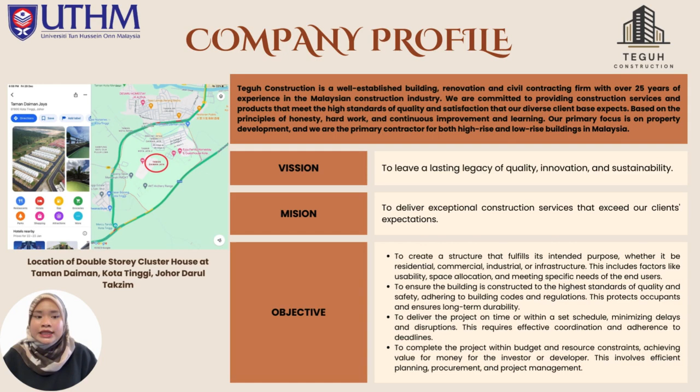Before this, I said that our group project is using Microsoft Project and Esteem. Okay, I want to explain what Microsoft Project and Esteem are. Microsoft Project is used to plan all activities involved in the additional structure work design, such as work progress, summaries, S-curve, and Gantt chart.

And Esteem is a piece of software that can take in and analyze almost any architectural shape, whether orthogonal or free form. By combining the given input, Esteem allows users to enter any type of floor plan the architecture is capable of. Alright, next is our project planning and scheduling.

For our project title, which is double-story cluster house, we start on 1 January 2023, and the duration of our project is around 252 days.

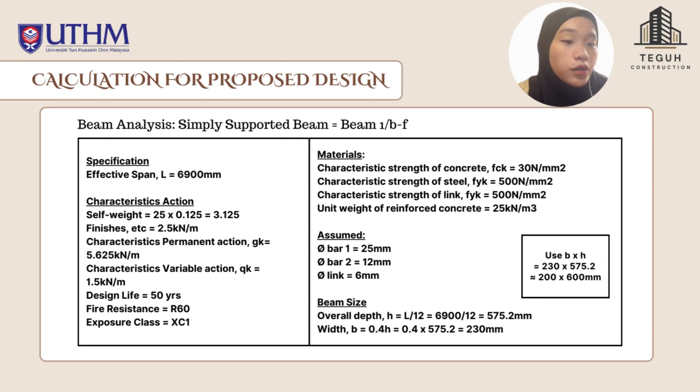Next, for the slab analysis, we choose 1-3/B-F slab, which is the one-way slab. The specification: the long span is 6,900 mm, the short span is 2,850 mm. Therefore, Ly over Lx is equal to 2.4, which is greater than 2.0, which means it is a one-way slab. The assumed bar diameter is 10 mm.

The slab thickness is 100 mm. The minimum thickness for fire resistance is 230 mm. The estimated thickness for deflection control is 142.5 mm. Therefore, we use h equals 150 mm.

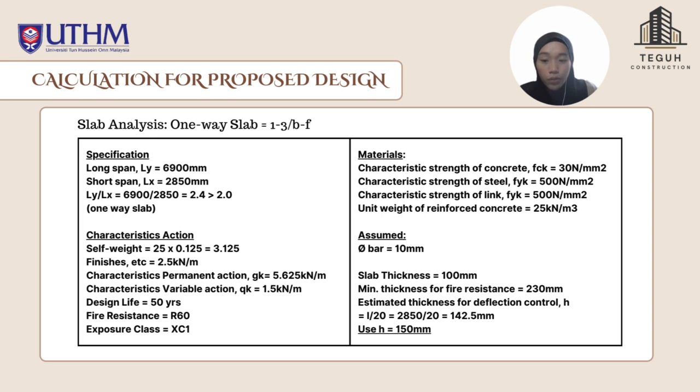For the column analysis, the design life is 50 years. The fire resistance is R60. The exposure class is XC1. The characteristic strength of concrete is 30 N/mm². The characteristic strength of steel is 500 N/mm². For the column size, the floor height is 3000 mm and the D is 200 mm. Therefore, we use a width of 200 mm and a height of 200 mm.

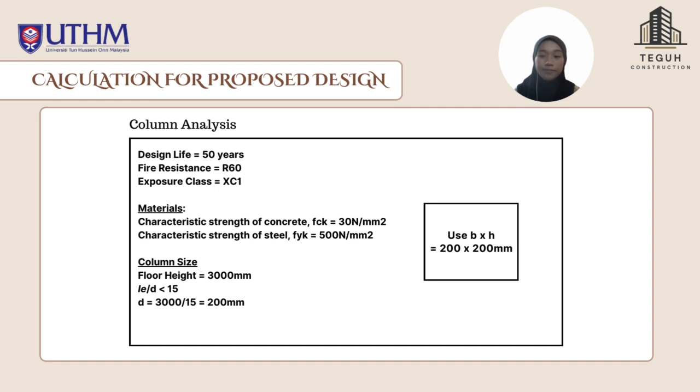So, for the data analysis, the manual calculation for beam, slab, and column. By taking grid line 1/B to F, the beam is a simply supported beam. Through the manual calculation and analysis, we propose a new beam size of 200 times 600 mm. For the slab, we have chosen grid line 1-3/B to F. Since Ly over Lx is 2.4, which is more than 2.0, it is a one-way slab. We propose a new slab thickness of 150 mm. Lastly, we propose a column size of 200 times 200 mm.

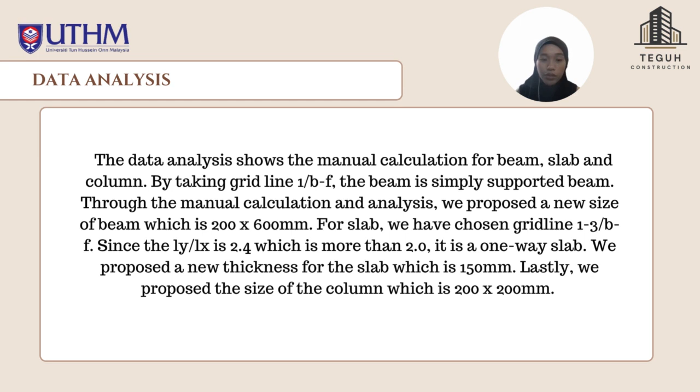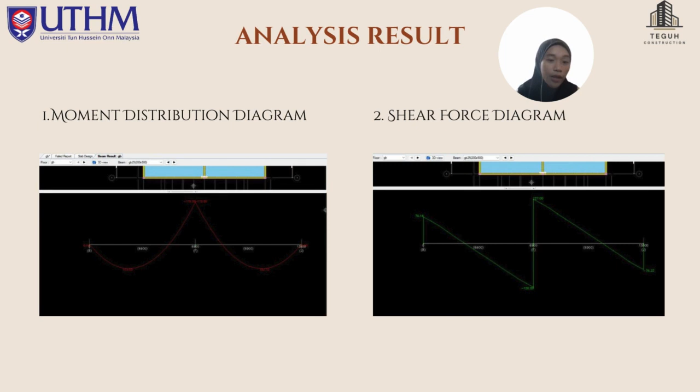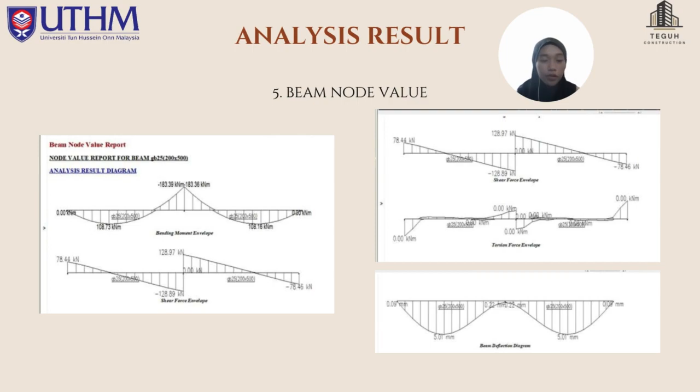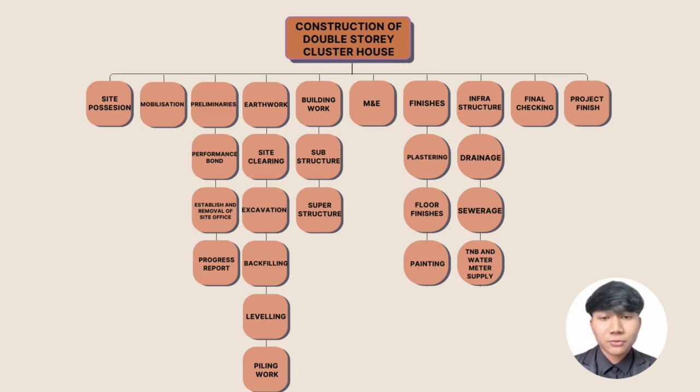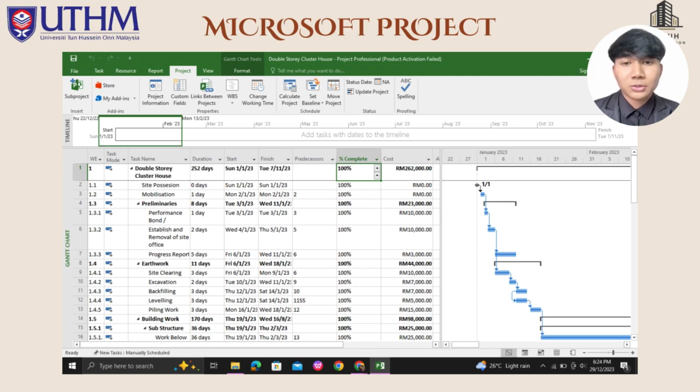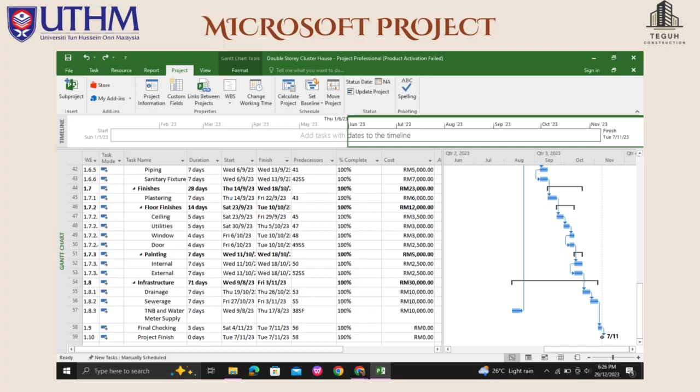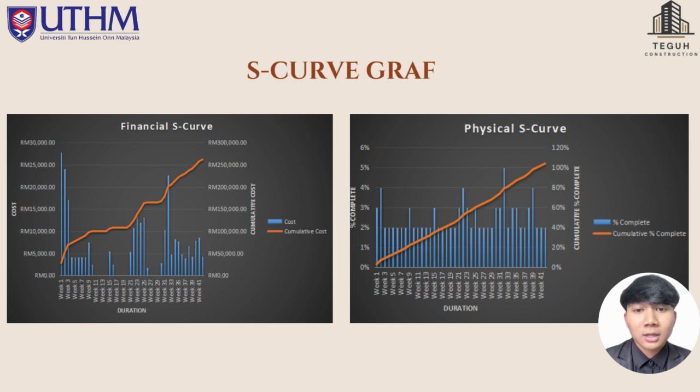Setting the units and properties in a new project created in the Esteem program is the first step. Establish separate levels for the ground floor areas of the house, such as the living room, bedroom, kitchen, car porch, and bathrooms. Place columns in key locations throughout the design to provide the building with enough support. For every column, we list its measurement, composition, and other pertinent information. Then, in order to distribute load effectively, we add 200 by 500 mm ground beams and attach them to the columns in the proper manner.

We suggested 200 by 200 slabs a piece. Therefore, it fits well with the suggested beam design. In the end, we assign walls using index 1 for the outer beam and index 2 for the inner to complete the finishes, and it results in low cost for the whole project. In addition, we altered the design of the roof beam and first floor beam by copying their plan views from the ground beam and basing them on the floor plan. Additionally, the suggested sizes for the beam, column, and slab match those of the ground level. In order to generate the data for the structure computation, we batch process as the last step.

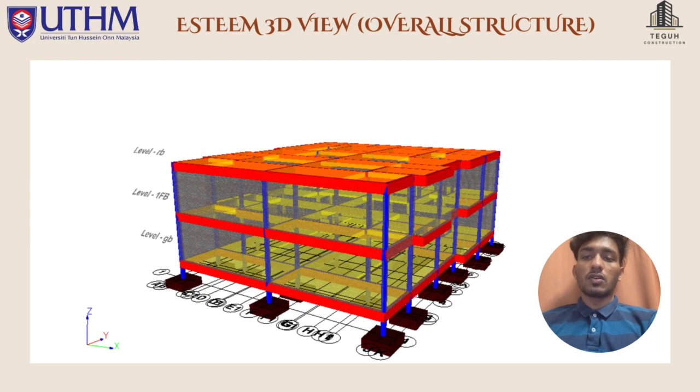To sum up, the utilization of Microsoft Project, Esteem and StaadPro in the planning and building of our two-story home project has shown to be a thorough and very successful method. With the help of Microsoft Project and careful project planning, resource allocation and progress tracking were made possible, guaranteeing a seamless project workflow from start to finish.

Microsoft Project and Esteem architectural features work together flawlessly to provide accurate 3D modeling and visualization capabilities that greatly facilitated our design process. Meanwhile, the double-story structure's safety and integrity were greatly enhanced by StaadPro's structural analysis. We heartily advise the usage of Microsoft Project, Esteem and StaadPro for comparable engineering projects in light of this project's success.